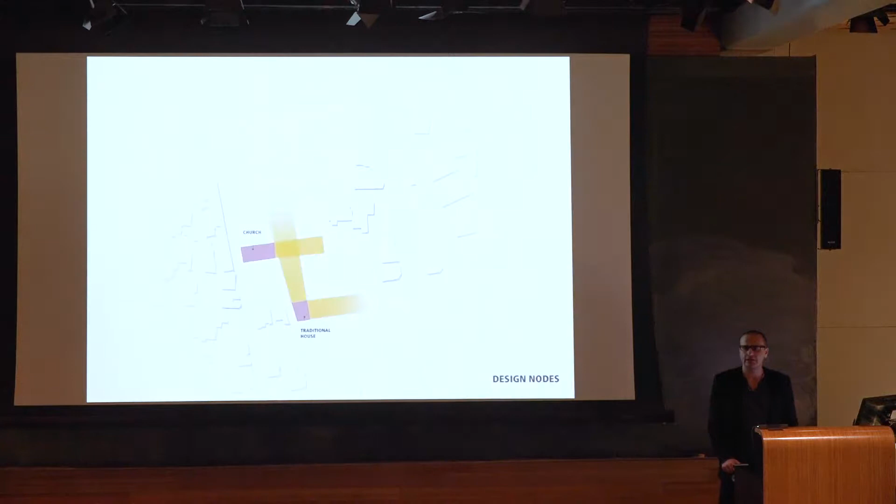So the BDD Master Plan is what we started with. When we met the client, we inherited a master plan that totally ignored a few old structures on the site - one is an old church from the 1800s, the other an old house, very traditional in terms of architectural language. So we thought to just add these to the plan, add value, and integrate these structures inside the project.

Just to relate a little bit to the map you've seen, this is the green line that we saw. This is the west, and this is the east side. We generated those masses based on zoning code and based on the grid line we identified.

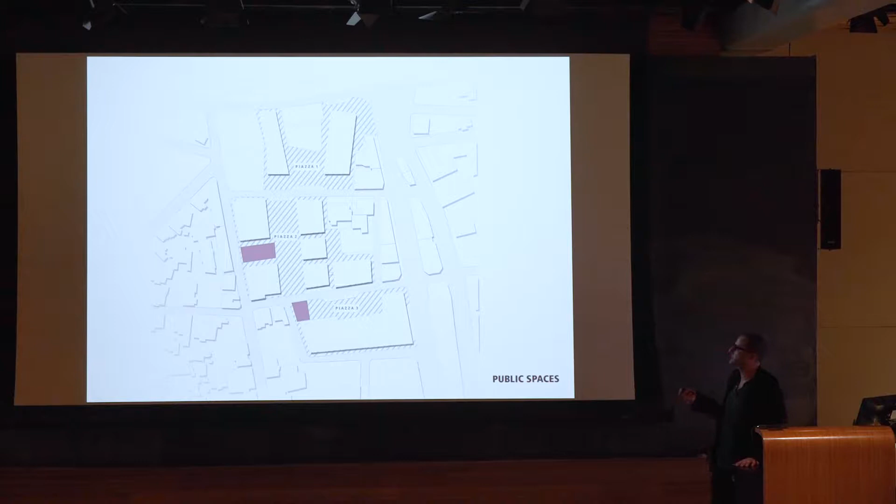One of the main things we're focusing on is the public space, those green areas we're calling piazzas. We didn't want the public space to be concentrated in one area, but rather flow on to the next block and further south. The idea is to create an openness that contradicts the division the war has had over the years, symbolizing a sense of convergence rather than division.

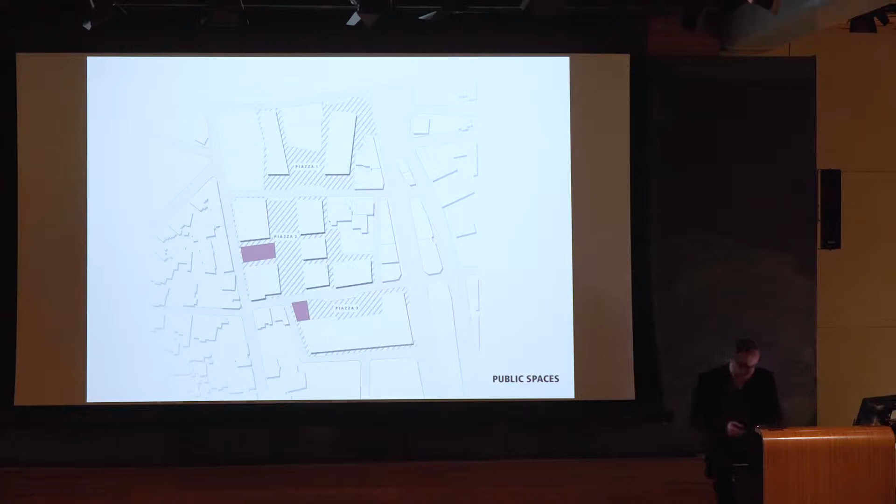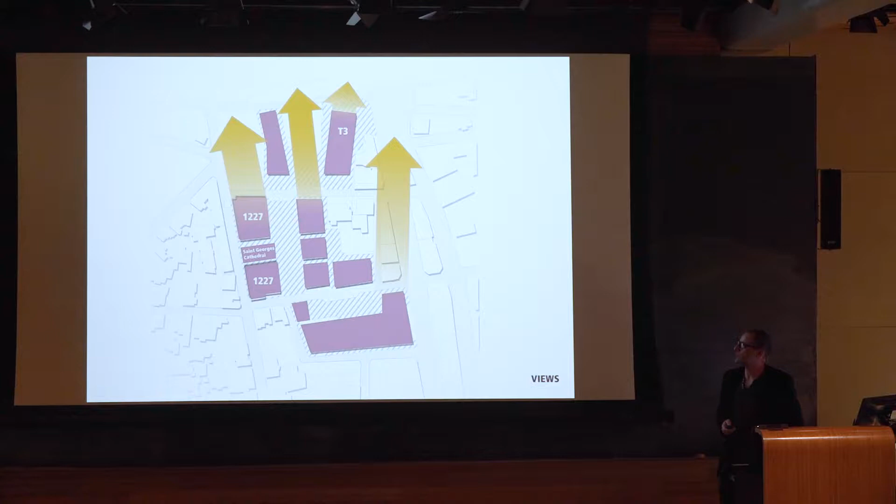This is a plan that was supposed to be built by 2022, but with all the actions happening around the area, it has now been pushed back to 2030. Once it's built, it will basically look like that.

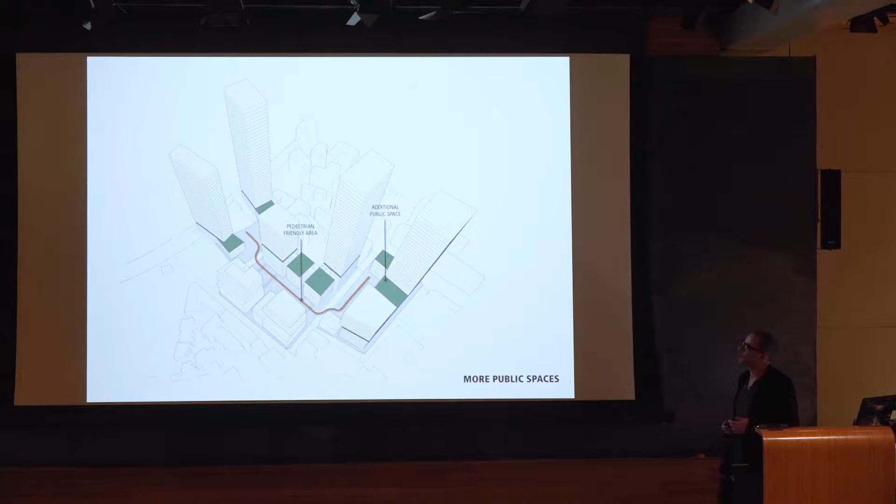We emphasize those open green areas by utilizing the layer on top of the roof, so we can multiply those areas and show how important they are for the neighborhood.

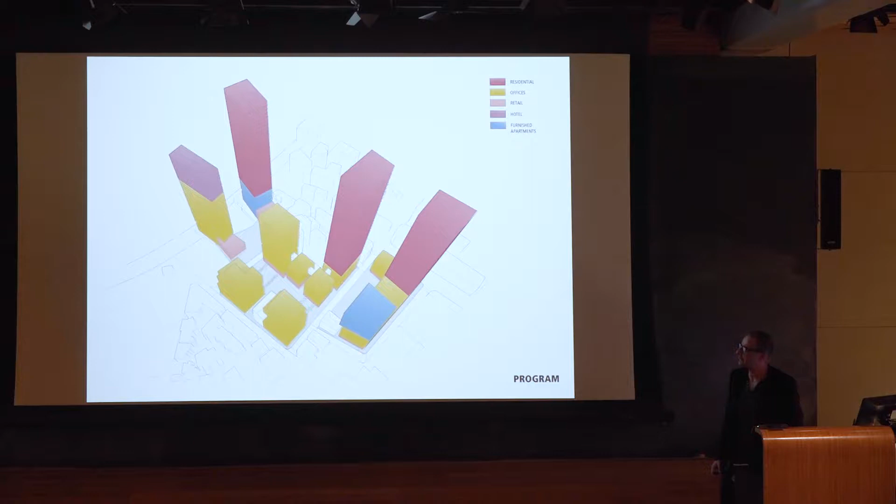Once built, it's quite a mix. Mainly it's going to be offices, but it will have a lot of residential that is mainly going to be the tenant of the BDD district, in addition to some hospitality project.

Up until this moment, the district was made out of renovated buildings retrofitted into office spaces, known as BDD 1227. This is the first ground-up project that we're working on.

When the first project started, it started with the north block as an invited competition. This lot is owned by an endowment of the Catholic Church, and the developer of BDD was worried that if these guys built later, they wouldn't have control over what would overlook the BDD Master Plan. So they went into a venture where the BDD guys would build these projects and operate them for some time, splitting the area in between.

By code you can't open to your neighbor. You have to step back, and there's a building envelope you have to follow. So by taking the building extrusion and the building envelope, we started carving into this block, creating this courtyard to legally get natural light for the offices and creating access from the side.

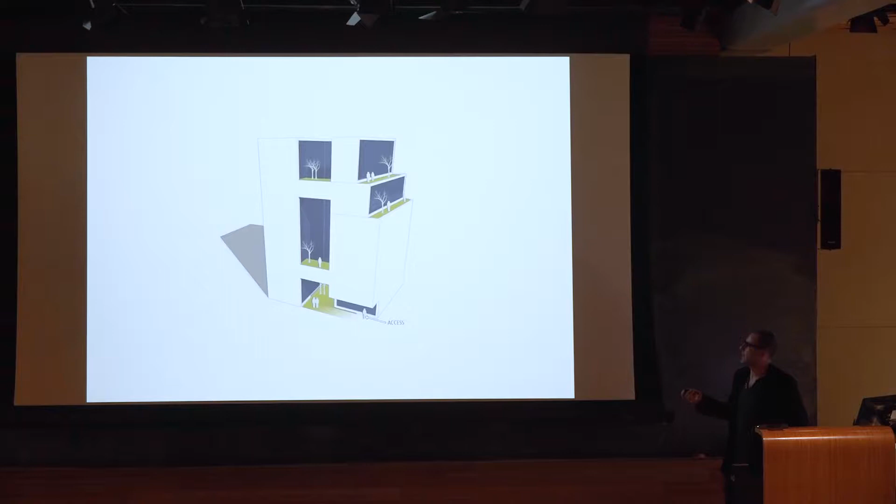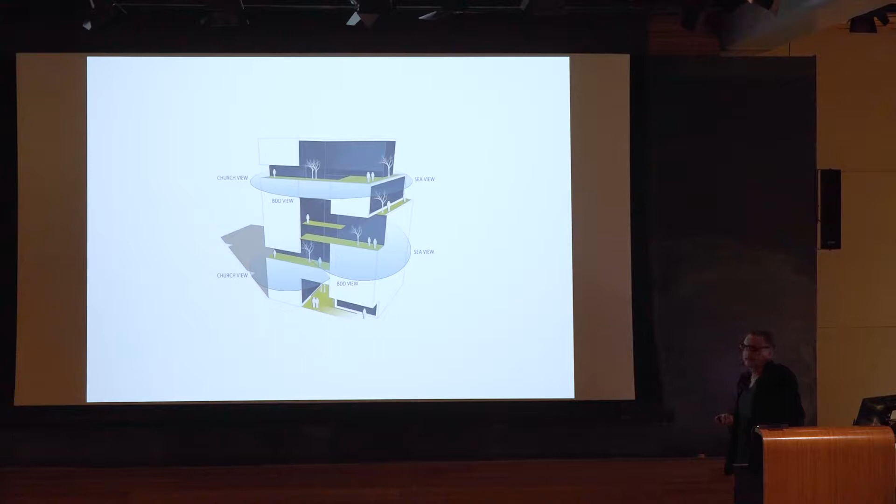This is basically where the master plan is, and this is the north side. With a series of cutting and carving, we introduced some outdoor areas. The weather is kind of pleasant over there - you have almost 300 sunny days per year, so the outdoor area is important.

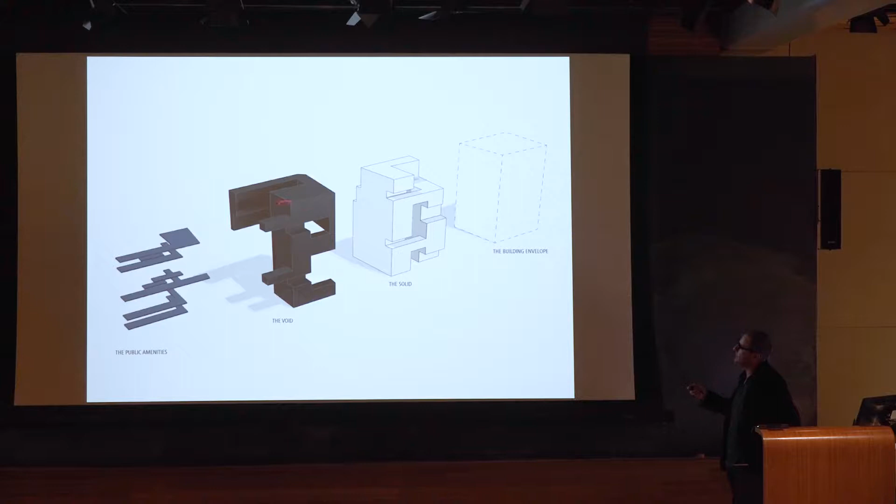This is how the components of the project are: the envelope, the solid, the void that was carved out, and the amenities or outdoor areas.

The other thing the client wanted was to create office spaces that really respond to what a digital district wants to be - this transparency, encouraging exchange between those startups. This was an important factor in their decision.

Once we got the competition and started developing the project, we were applying the French fire code as we applied for the permit, which requires 1.2 meters, about 4 feet, of solid area between the floors. So the whole transparency idea we had in the concept wasn't going to work.

So we looked at a system we employ on the facade where we can blur those horizontal boundaries between the floors, and since this is the first building, give it a look that implies technological advancement, which would go well with what BDD is about.

So we worked on these 3D kind of panels, perforated panels. They also act as sun breakers depending on their orientation and which facade they're applied on, and they help reduce heat gain.

As we were working on the North Tower, they thought, okay, we want to develop the lot to the south of the church, so we wanted both buildings to speak the same language. At the same time, there's this intention of having them less static, a little more moving, so they can communicate with each other, overlook the big piazza, and communicate with the church as well, being stuck in between.

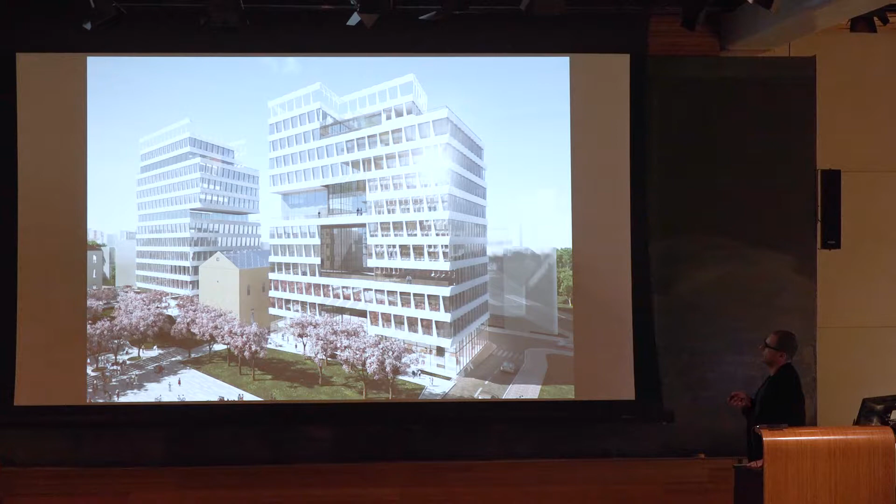So this is how these buildings will end up looking, with a series of stacking volumes.

Once we were in the middle of that project, the church came to us and said, since you're doing the whole project, why don't you renovate the church for us? I was like, all right.

That was interesting because this church had been there for a long time, and it had witnessed the war years, and it was pretty destroyed with no roof.

We took this idea and developed it in a way to create this spiritual space made out of this abundance of light.

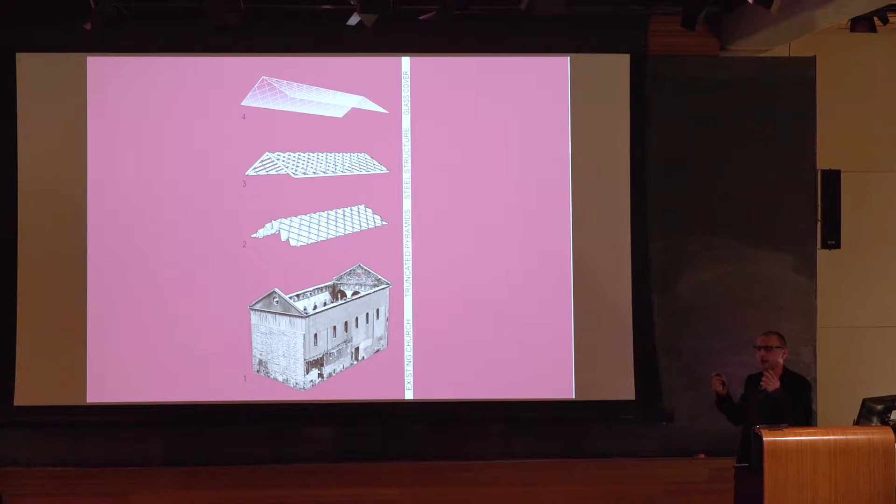Those truncated pyramids symbolize all the bombs that were exploding and throwing shrapnel, as if they were frozen in time, but instead showering the space with light rather than destruction.

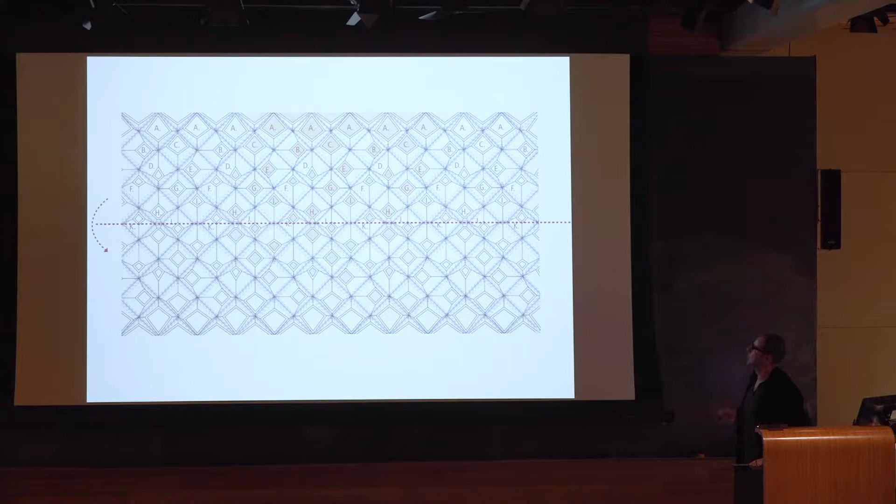That's a ceiling diagram showing the different components of the ceiling, and that's how the effect would look from the inside. One aspect of this project was that because the civil war was basically sectarian, the issue of religion is kind of a taboo.

In Lebanon, with the community of BDD almost 60% younger than 35 years old, most of those people were born after the war. So we are addressing the post-war generation when it comes to the design.

We wanted to create a space attractive for a younger generation, so they might be interested in at least visiting or looking at what a church or religion could do for them, rather than running away because of what they've heard from their parents or read in history books. That was one important aspect, making this church accessible to the younger post-war generation.

These elements look like the ornaments found in old Eastern churches in that region, but they're interpreted in a contemporary way. At the same time, they act as acoustical elements for the high ceiling space, about 15 meters.

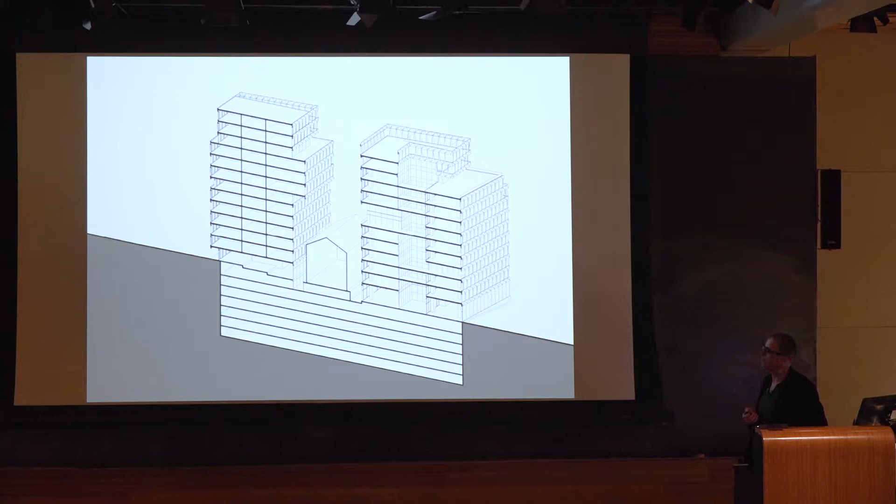So we had to come up with a system to hold the church in place. We used waler beams supporting the steel structure, holding the walls because they could collapse anytime, while doing the excavation of 6 basements underneath, holding everything in place.

So this is like as if we are inside the church looking down. This is the North Tower, or North building, essentially hanging the church up in the air and creating continuity in the basement for an efficient parking system for the project.

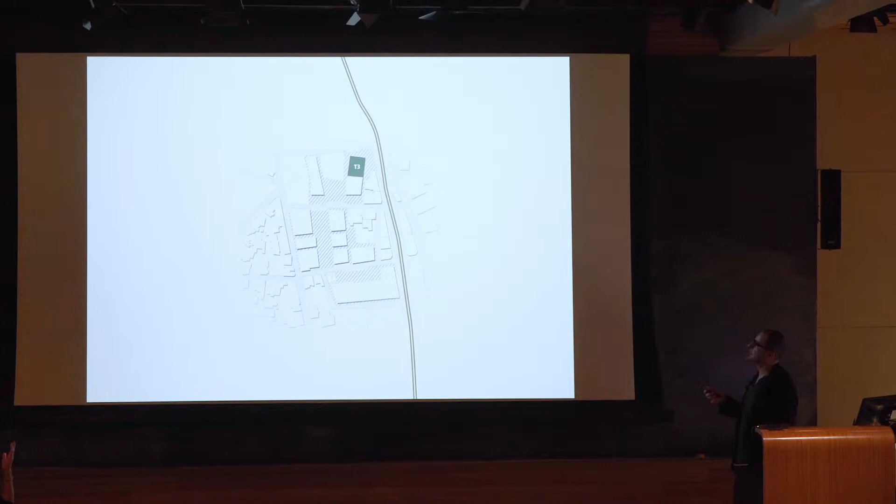The third project we're working on in BDD is called the T3 Tower. T3 Tower is located right at the edge, at the tip, overlooking downtown, and this is the most strategic location. So this is the signature building they wanted for the project.

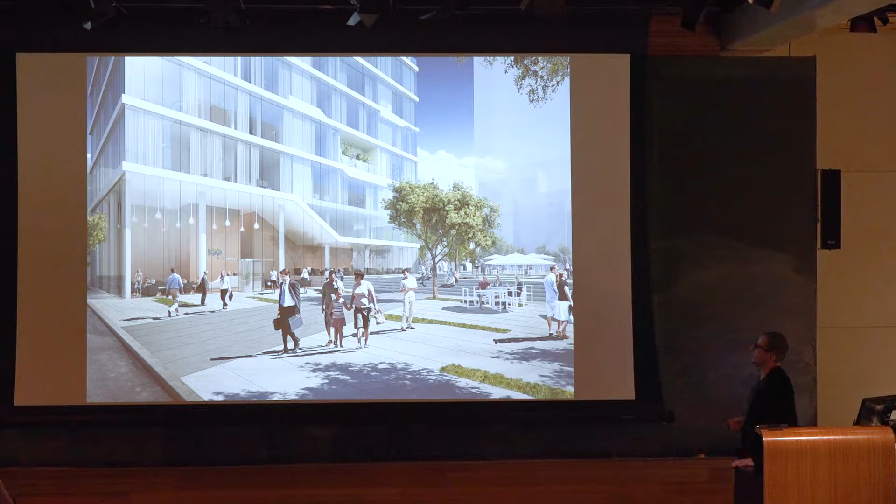It also takes the ideas behind the master plan, the openness, and deploys it in a vertical way on the building. So the building looks quite transparent, kind of blurring that division between east and west, because this is where it's located. One advantage of low-rise development is being close to common areas and having access to green spaces.

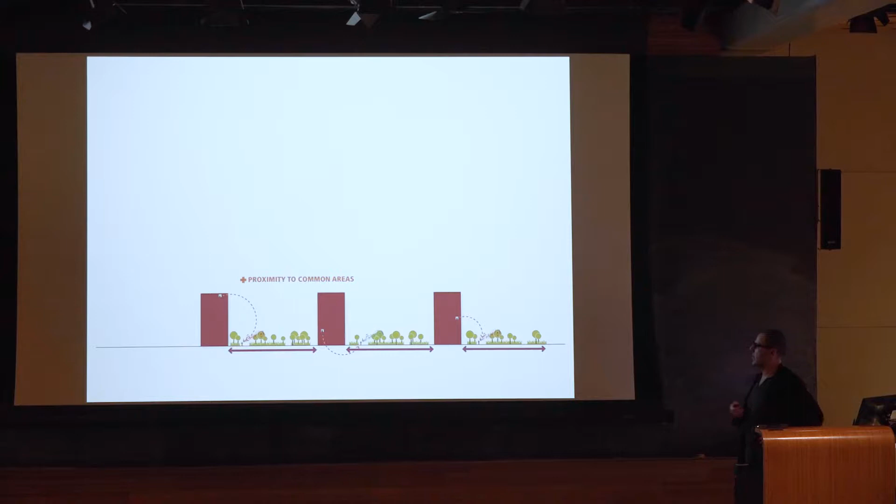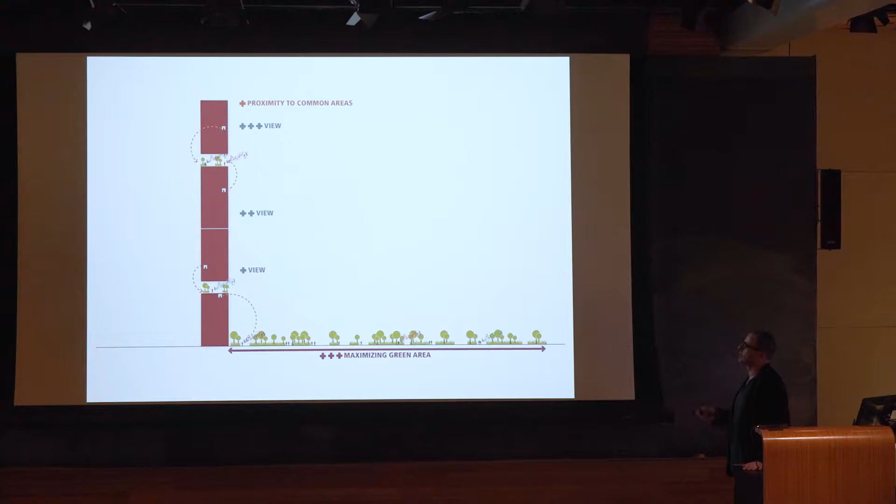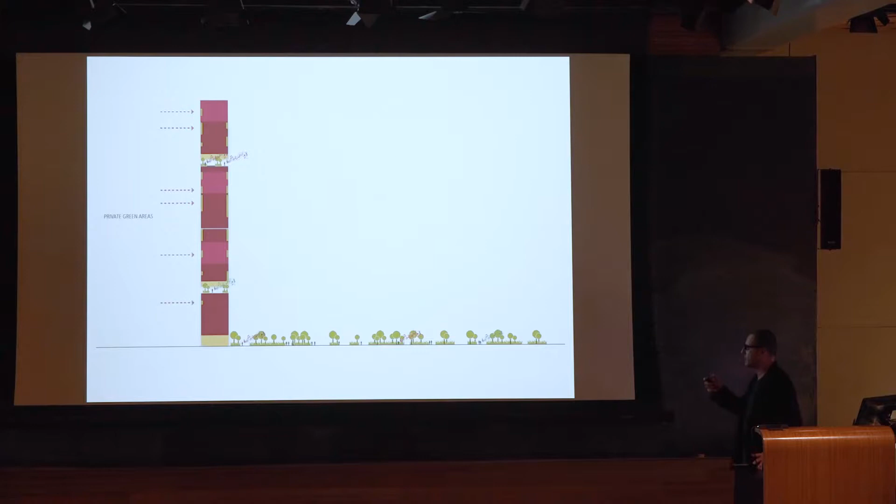With our case, we had no choice but to go with a high-rise. So we thought that by doing some stacking and inserting, we can get the same benefit of proximity to those common areas by inserting them vertically in the building, while also gaining views and creating different types of apartments, even bringing that green space all the way up and giving them not just as public, but also as private green spaces, becoming like a kit of parts. When you get your apartment, you have the option to choose if you want it green, a pool, or just a landscape area.

So that's a general section on the building, and that's how it is programmatically. It has a lot of variety of residential units, and they are all based on the community that will live in BDD.

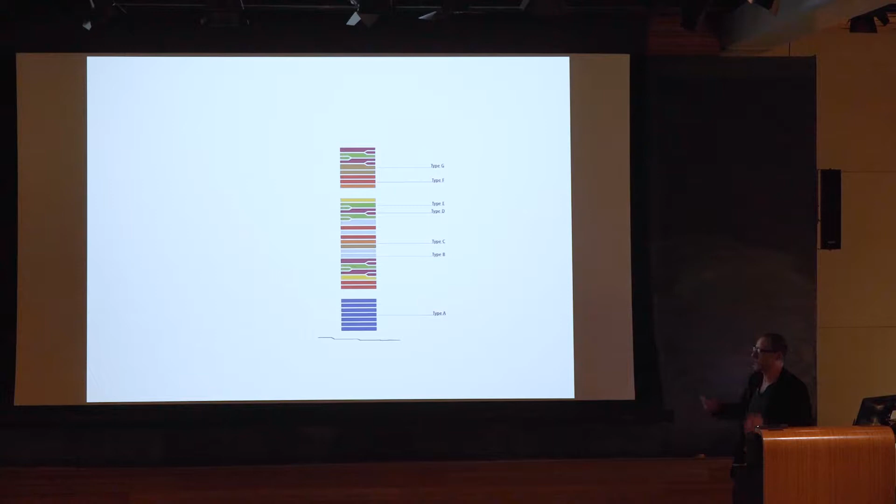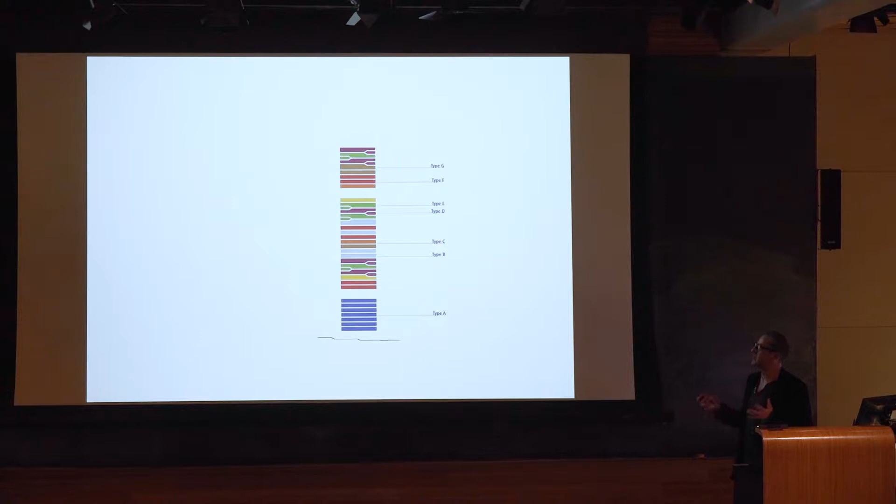We looked at Richard Florida and the theory of the creative class when we worked on this project, because this is really what this community is about. They have completely different needs than conventional or older families, like our parents. So open space is extremely important, the communication with the outside, and the size has dropped. Typically apartments in that region are really large, so it's no longer the case with these guys.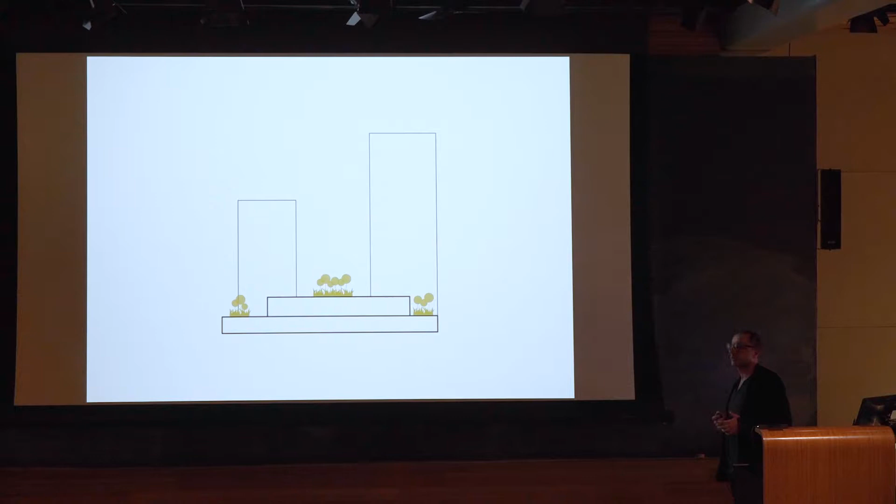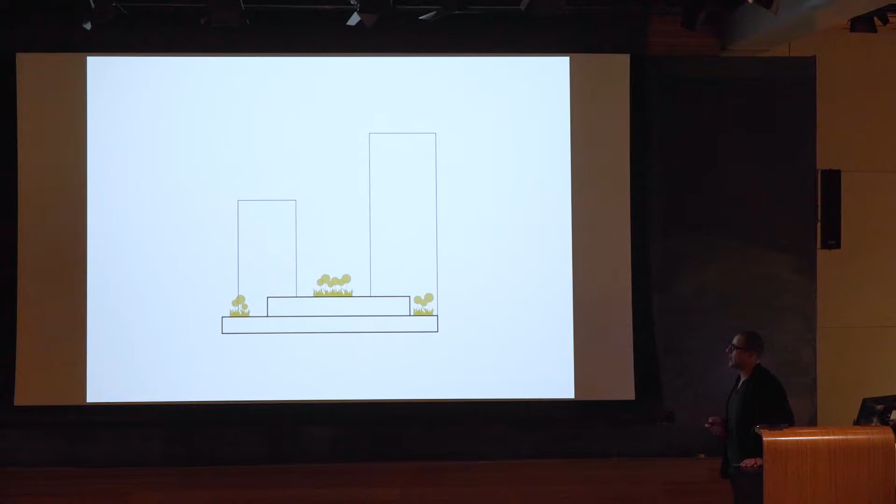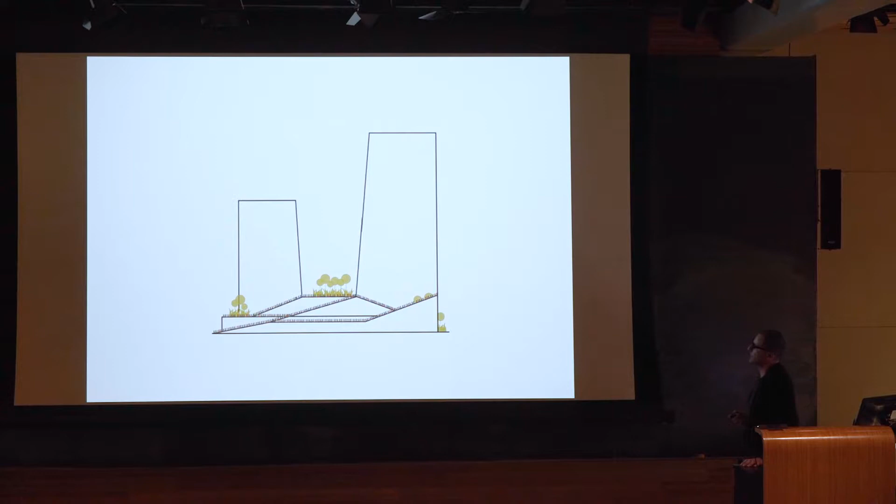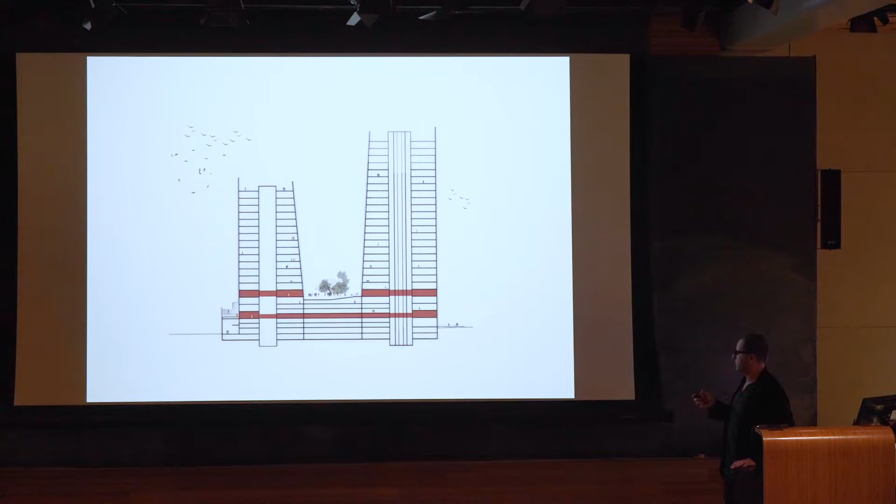At the same time, they are a city that is promoting itself to being pedestrian friendly, encouraging a lot of pedestrian walkways, wide sidewalks, despite the harsh weather they have over there. So we started connecting those different levels for pedestrians using some ramps, and we even shaped the tower, opening it up to emphasize the space there, showing where those public areas are in relation to that podium.

That's the massing study of the building, and the result is a podium that is sloping, taking people around, climbing up and down to reach that main public area. And this is the main corner overlooking the tower, so this is like the main entrance.

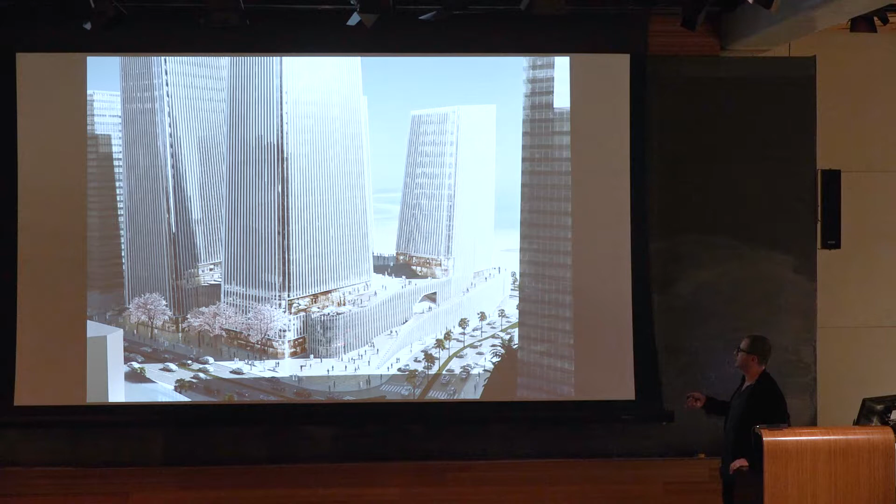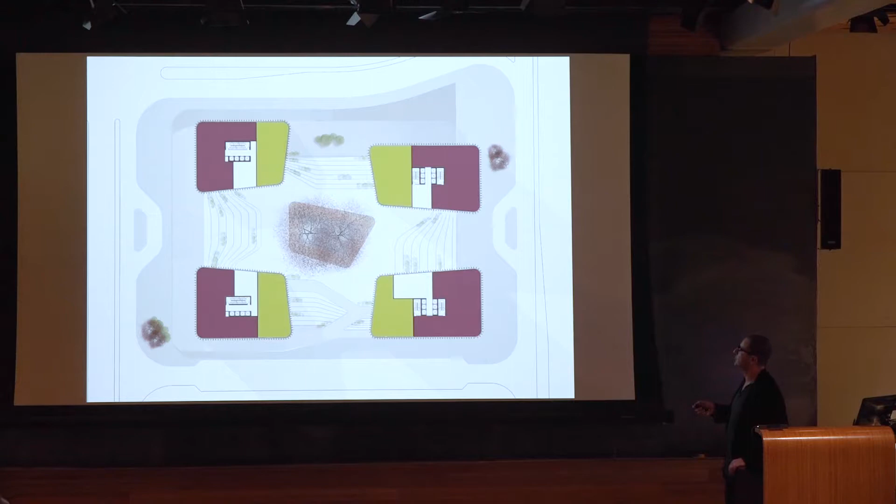So we used the podium to create this axis, and where it intersects with the horizontal floor, we have those cafes and public areas that enhance the project. That's the middle area with the topography of the podium climbing up to reach this central area.

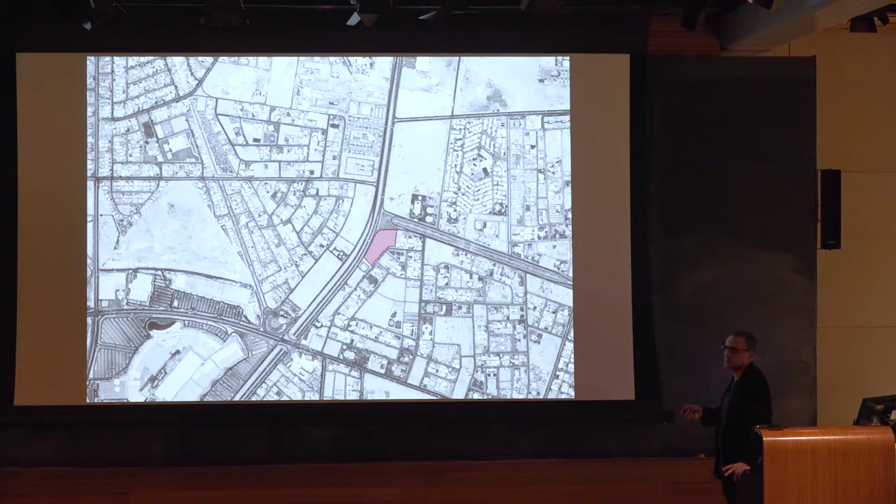Another approach on the public spaces in that country is a project we're doing in Dammam. Dammam is a city on the eastern side of the country towards the Gulf. Basically, the client wanted an office park, a series of office buildings with various floor plate sizes, on the ring road and a major highway, very close to one of the few malls they have. So this is where the site is.

We looked at different organization and plan, and we were inspired by the idea of the oasis, how we could create some porous organization with different and unique views for each building, creating access for vehicular drop-off or pedestrian access, and looking at how we could drop the public space a little bit to have this effect that you are contained in some kind of a valley, like the oasis.

And we worked on this because the program called for a ground floor of F&Bs, so to encourage the area to be more pedestrian friendly, we worked on the geometry of the building.

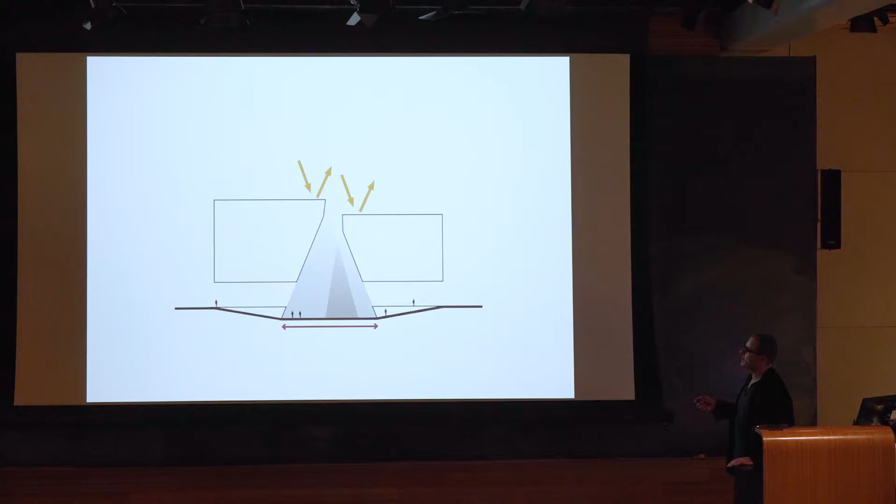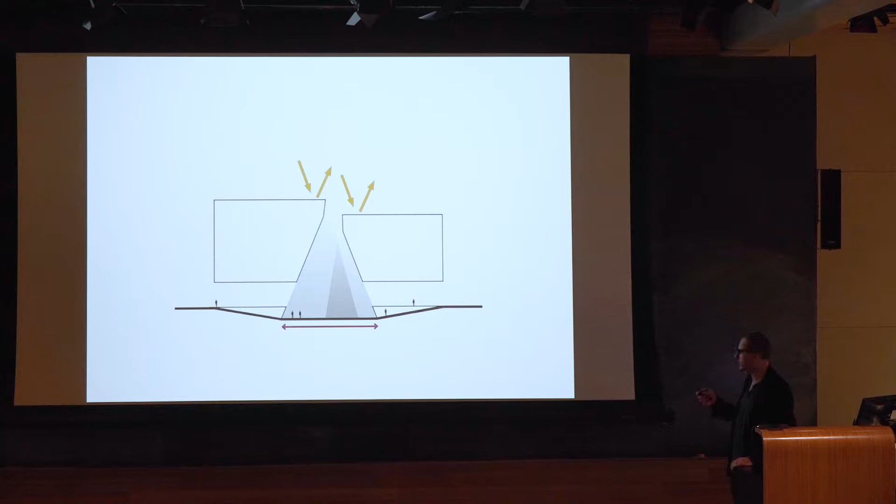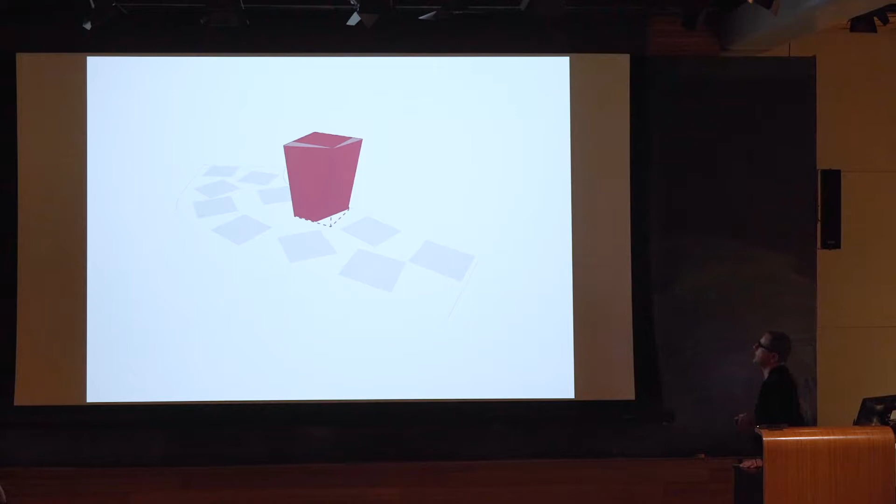So by making the roof floor plate bigger than the ground floor, we decrease the area where the sun rays can reach down, and the result is a more shaded area in the middle. Adding to that, some water features at the entrances cool the air as they go down. So this is like the steps of how you could shape those buildings and create those completely shaded spaces.

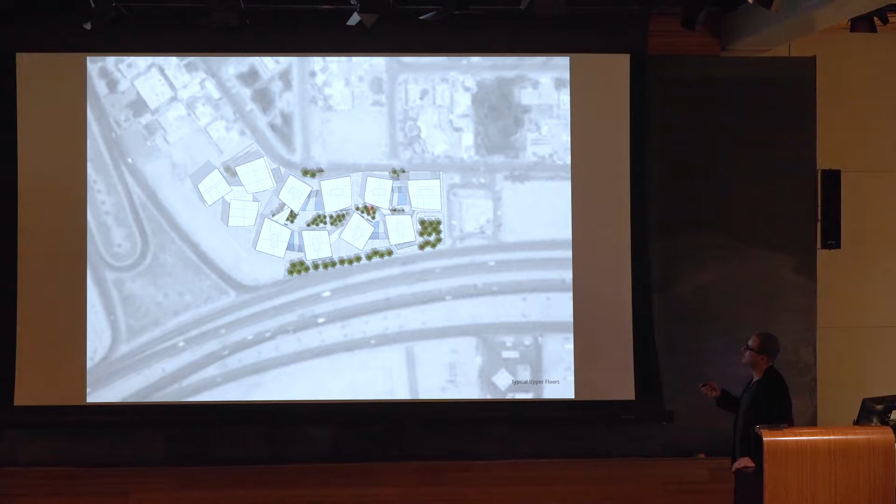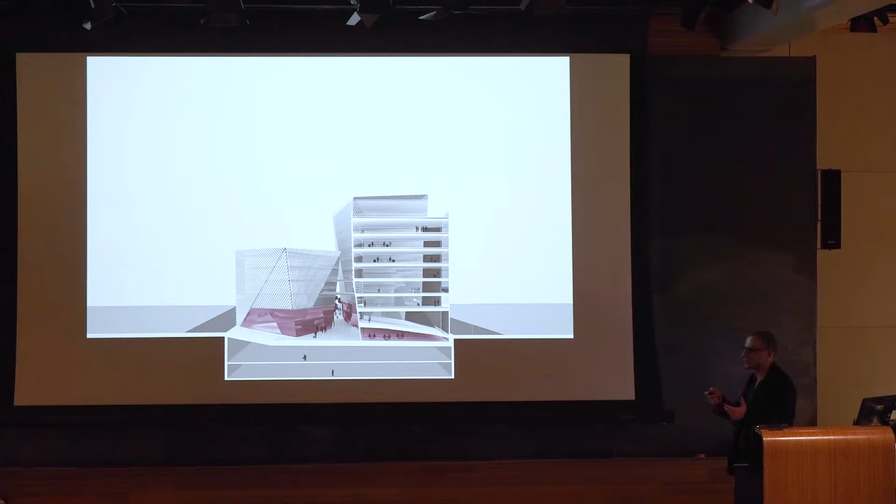That's how it looks in plans, with a lot of green spaces and alleys for pedestrians, with all these water features. And with this section, this is kind of what we were looking to have - the oasis, the old traditional way of how they used to do their markets and souks from the highway. So it's a series of pyramid-like facade buildings that align on the street.

This is another theme that we've been working on, again this obsession with privacy slash luxury, and when you combine both, you can have something extremely exotic.

This is a project for one of the king's sons. Basically during the summer, the king leaves the capital Riyadh and they go to stay in Jeddah, which is kind of the beach city. Not that they go to the beach, but a lot of people travel with the king - assistants, ministers, princes. So all these guys, there's a lot of people.

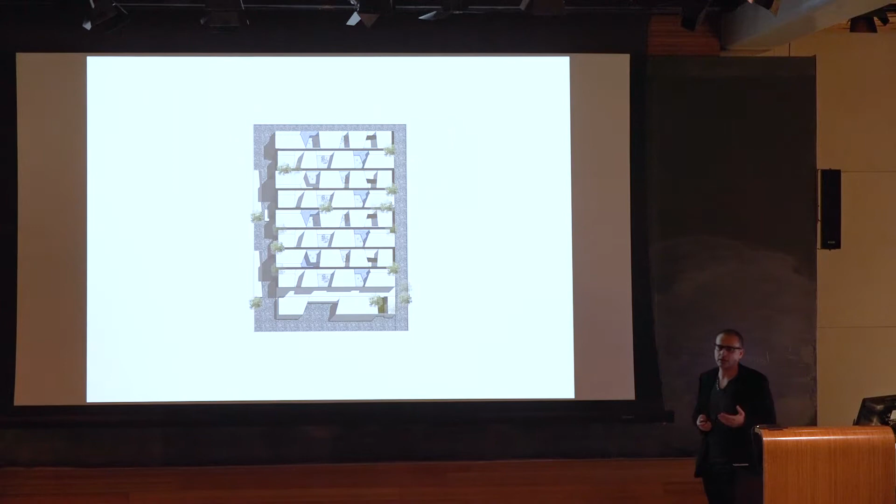So they needed a place to stay during their travel that is completely private, completely secluded, where they can see no one and no one can see them. This is really an obsession.

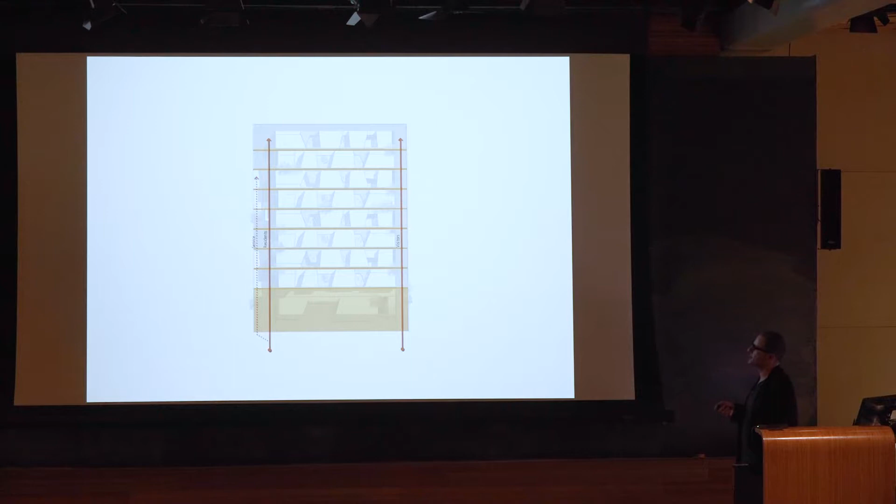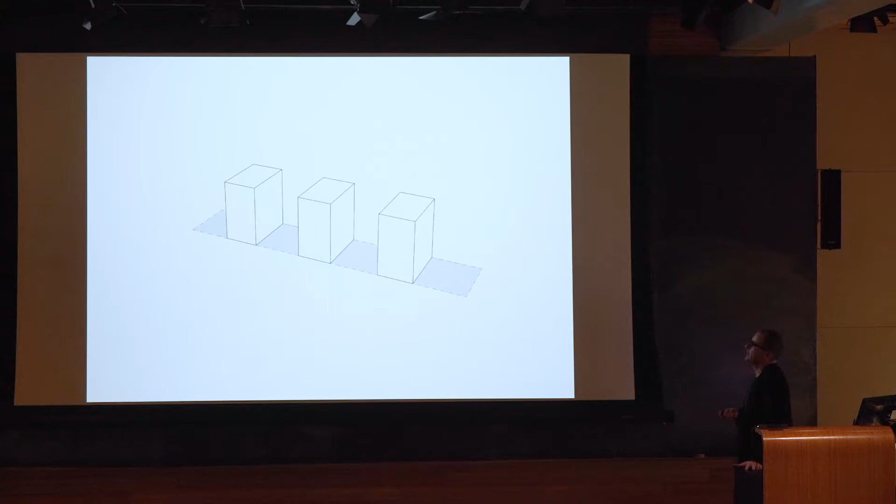So we looked at the lot and how we could create those villas with maximum privacy and maximum open spaces. So the circulation is limited to the ends, where we could maximize the space in between. Taking just a typical box of what a villa or house could be, it was split into pieces and then connected, creating the spaces in between.

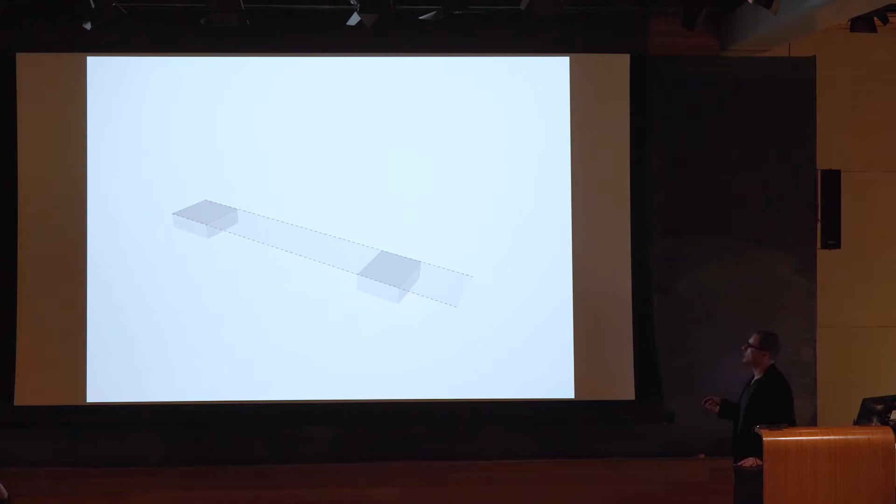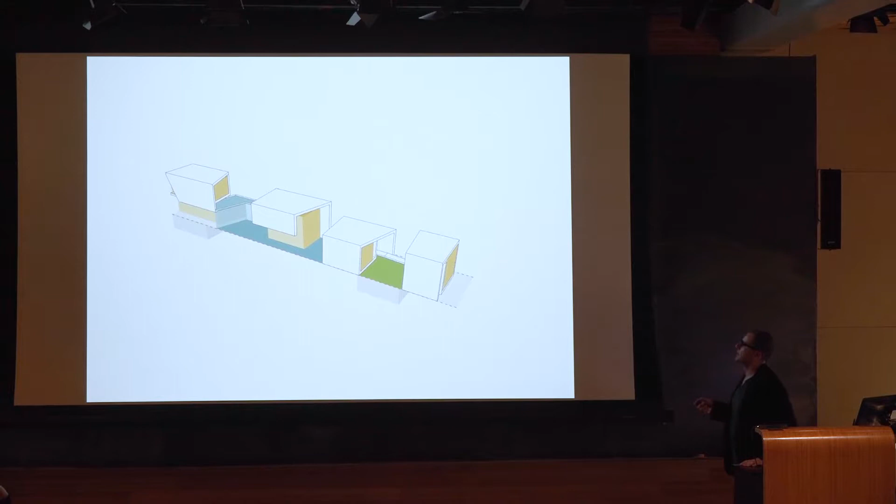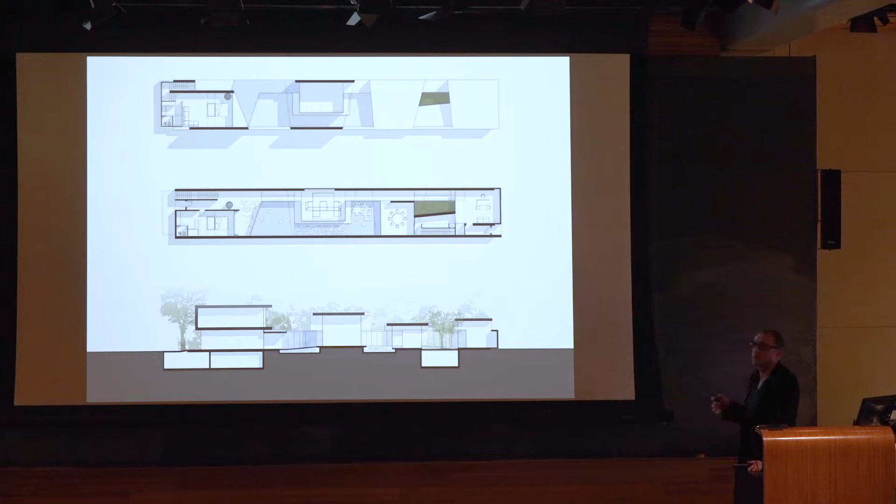So as a diagram, this is like the private garage with the service access point, the building blocks above, wrapped around with some kind of surface, and introducing landscape with water features, like waterfalls. In plan, it looks very fragmented, like pavilions with the bedrooms, an office space. So when the assistant of that VIP person comes in to sign some document, they are only limited to a very small access. The service comes from downstairs, serves the dining and the space, and then they can just leave. So it's all about not being seen, or them being felt that they are around. And this is like a view through those blocks.

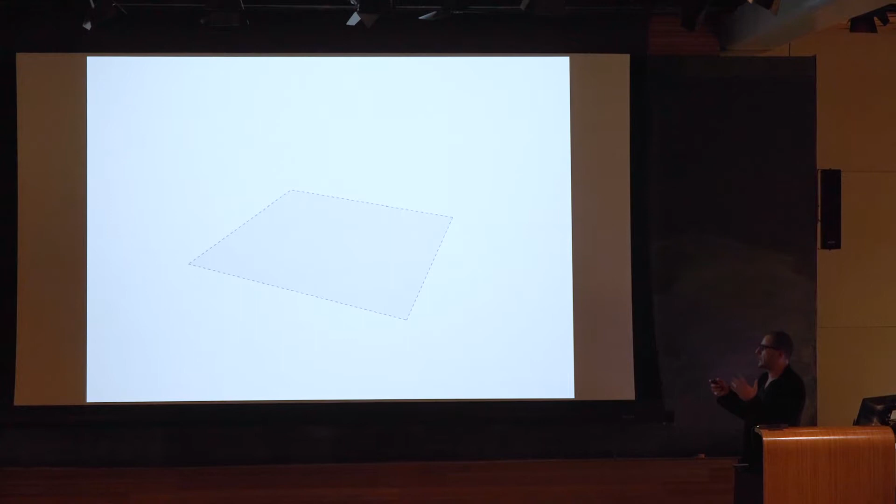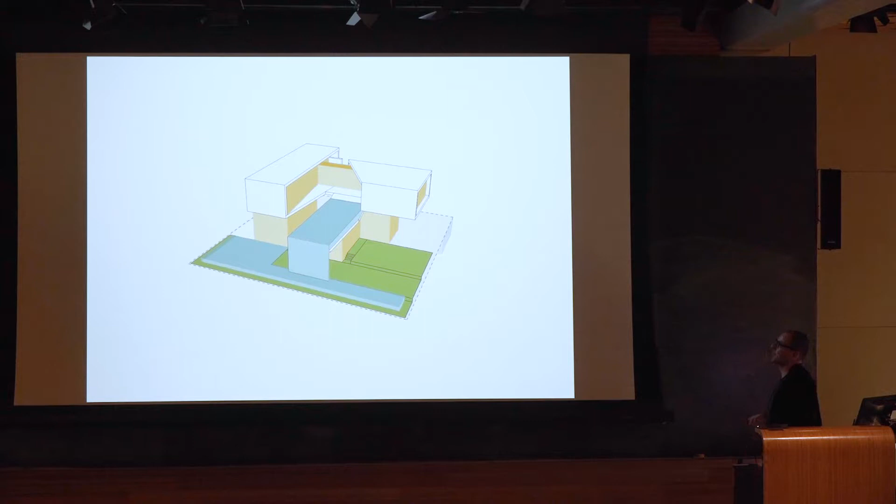They had two sites and two different typologies. The first one we saw is for a VIP. This one is for the royal family, so a prince or something like that would come and stay in this one. It's the same thing. I remember when we were given the brief, they said they want the most luxurious place to stay, and they want to pay, I don't know how much per square meter to build that project, but they want something completely different. Then you start putting effort on things that may seem superficial, but they respond to a certain culture.

Basically, this is the same story with a different arrangement. They have two master bedrooms, one here, connected with a bridge. The pool is elevated with a glass railing that creates a waterfall going down, and the living room down there has glass blocks so you can see the pool from below. Things like that just translate what the culture needs or what the culture is looking for.

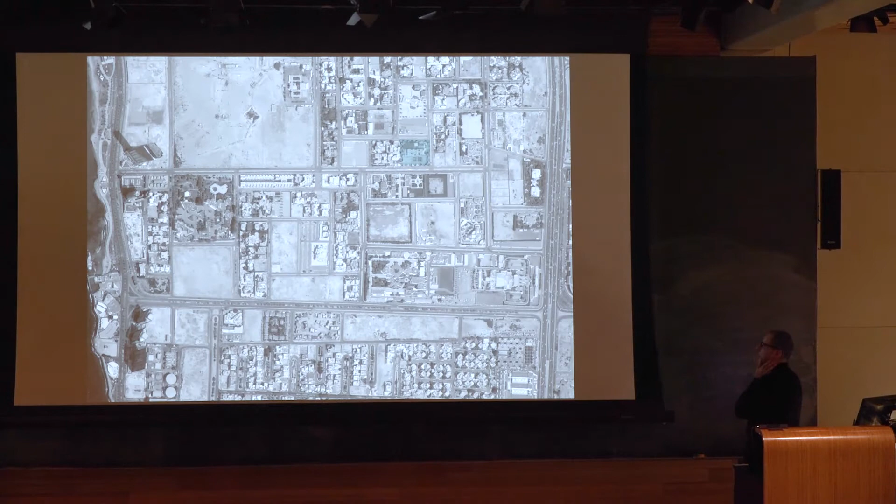Another similar project in terms of theme is the Blue House, but this one is privately owned, for a family of a prominent businessman in the city of Jeddah. This is also about extreme privacy. This guy has 5 daughters, so there's an even bigger layer of privacy, because in Saudi culture, until very recently, they separate women from men, and having 5 daughters is a big challenge.

So basically, this is a lot that is in the city. It's almost 11,000 square meters, so that's like 110,000 square feet, and it's just for one family. The built-up area is about 40,000 square feet. The way the house is split, it has many entrances - service, secondary entrance, the main entrance this way, and a series of courtyards.

These courtyards are service courtyards. The client wanted to hide anything that is service, so they have 8 bedrooms for drivers underneath here, with the main kitchen, the cooks, the security and the guard. They all share this courtyard. So as you enter, all you see is greenery, and these spaces take natural light from the side. This is the service courtyard overlooking down to the domestic helpers' bedrooms - I think there were 4 or 6 right there.

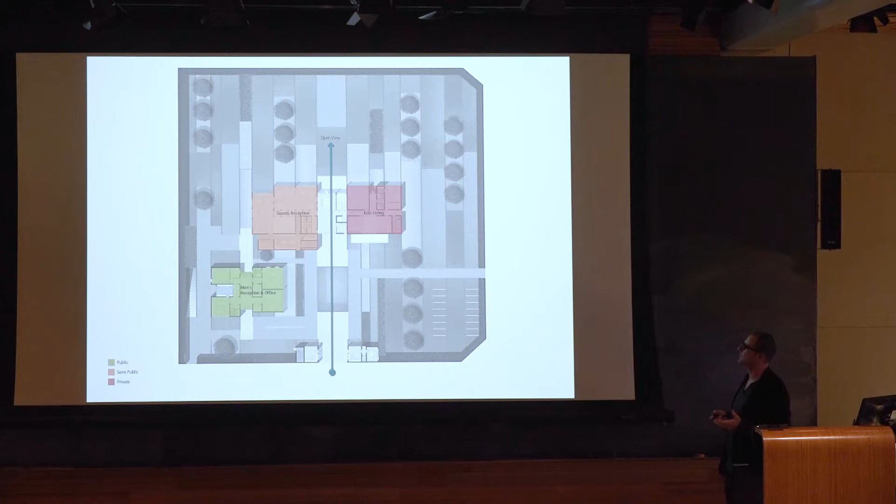And so when you enter, this is how they are hidden underneath - that's the second one over here. And so there is this obsession again of being above and hiding the service.

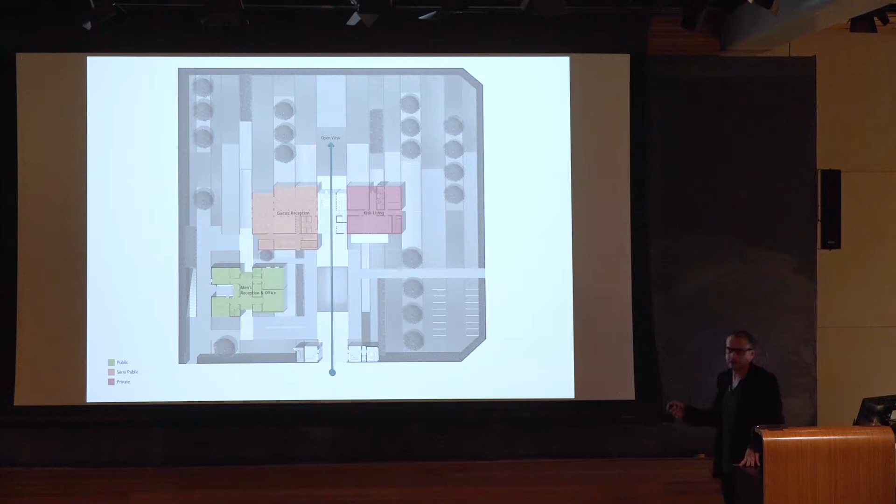When it comes to the main component of the house, there is the men's villa, or diwania in Arabic, which is basically the men's salon or reception area. Then there's the reception for guests, and then there's the kids' wing, which has a library, gym, a guest bedroom, and their own living room. And it's fine if you see through here, because you're not going to see anything - all you see is some green, so they're not worried about that transparency.

Upstairs is basically for the kids, so 4 daughters. Actually the 5th one is married, and that's why there's a guest room - she comes with her family and stays downstairs. That's the family living area, and that's the master bedroom, which is 180 square meters.

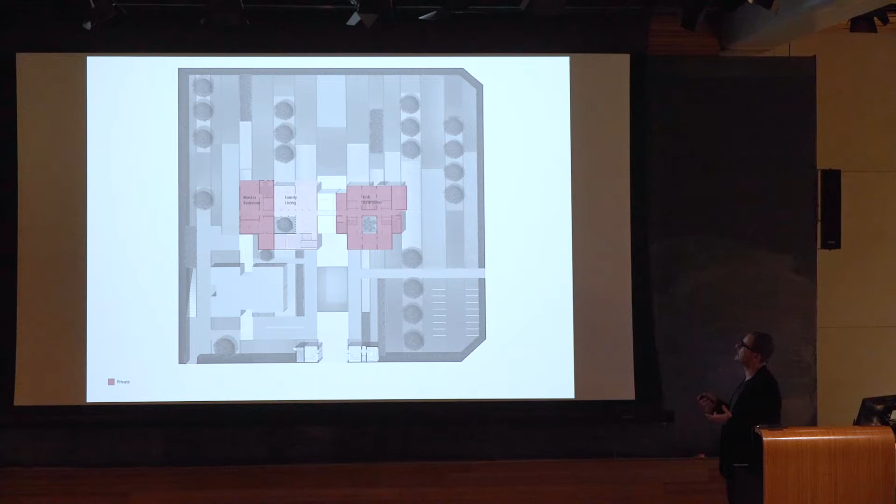Basically, the importance of privacy has led to a series of courtyards around which the house was developed, and it's amazing how much you could do to secure this privacy. All the building facades were related to the issue of privacy. So we developed a contemporary screen that echoed the old screens we'd seen in a previous picture of the city - they're called Musharabia, made out of stainless steel tubes attached to sandstone imported from Spain. Jeddah is very humid, so sandstone is really good for the humidity. And this is one of the courtyards with small openings that give onto the main plaza outside.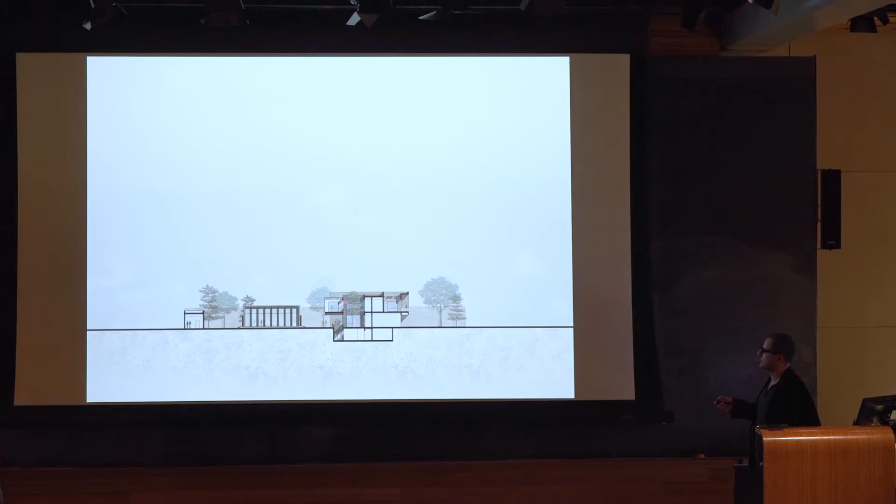That's another courtyard they give to the living room, and that's for the family living. So all these series of courtyards lighten up the space and make sure they are not seen from the outside. And this is how the section is developed. So this is a service courtyard, this is the family courtyard, and the office sits right there. That's how the building looks like.

You're working with a mass and you're trying to just punch it where you really need to. And that's the office overlooking the house. For me, this picture is interesting because this office looks like it's even protecting that house or those daughters that they have.

And the pictures are taken using my phone because we were not allowed in the house once it was completed. So it's like, you can't go in, we live there, you have to respect our privacy. And plus, we don't want you to copy the design. I think they don't know we have the drawings.

Going back to the village of Faraya, we saw in the map of Lebanon, it is the winter sport village, like an hour and a half drive away from the capital. This is like a weekend house for a family of 4 that don't even live in Lebanon. They live in Dubai and they go to spend the summer and the winter, the Christmas vacation, and the mid-year break to go skiing. The site is right behind those trees right there.

So the area is famous for all these rocky formations you see even further away and even here. This monolithic natural bridge is actually something interesting to see. And this is something we were inspired by when we took over this house.

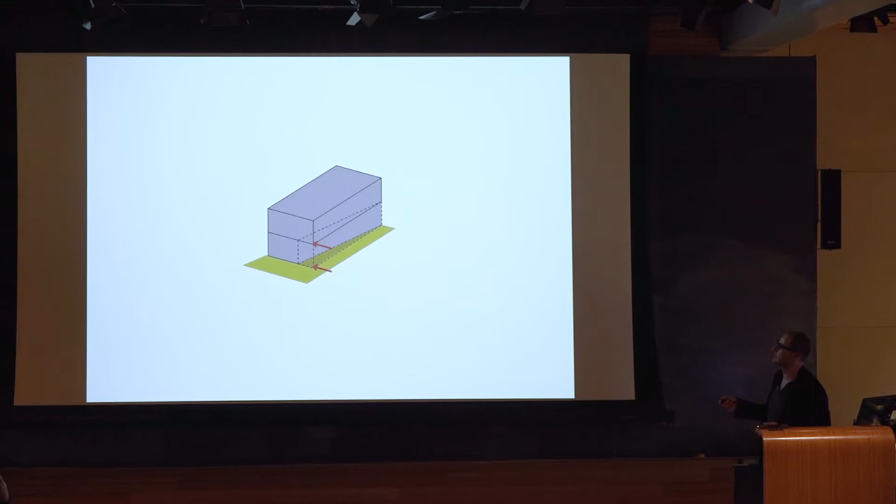It's a 600 square meter lot with a 250 built up area. So we took the building envelope and we started slicing it. I call it shaped by the views. There's a public garden that's going to be developed right next door, and we have open views this way, open views towards the mountain right there, and we'll put a skylight. So it's as if those side angles came and sliced the building.

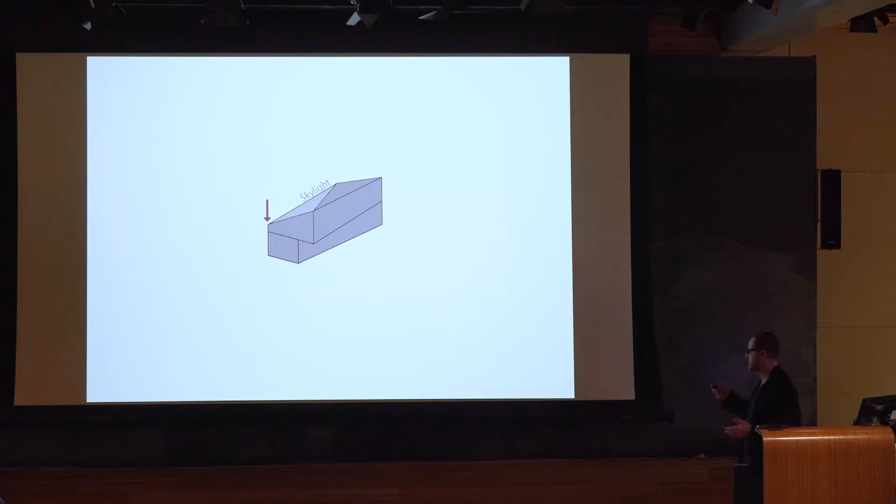Basically in terms of program, there's just a couple of bedrooms for the kids, a bridge that acts like a kind of sitting area, reading area, the main bedroom, and the living space that is open on both sides. So during the summer this is being oriented north. When you open this side and the other, you have a really naturally ventilated or cooled area. That's this section over the deck and the main space.

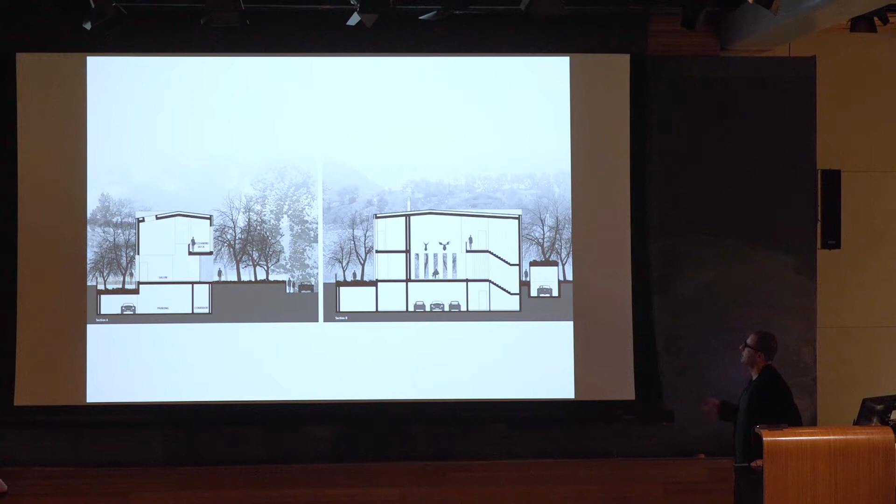Going back to Jeddah, this is a project we're currently working on, but I thought it's interesting because it also relates to the public space, and I thought to share it with you guys.

There's a lack of public space in Saudi Arabia, and right now they just developed the waterfront into a park, and this is like a big thing for the city and a big thing for the citizens. It's like the only way out, as a breather.

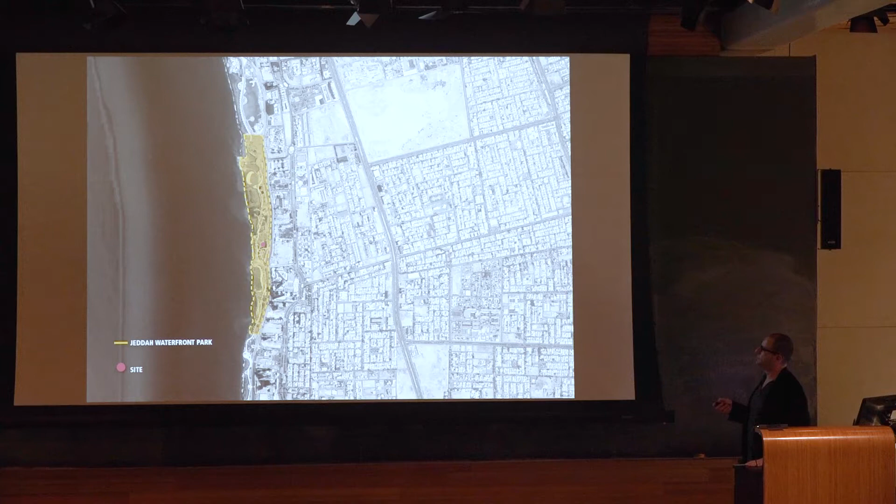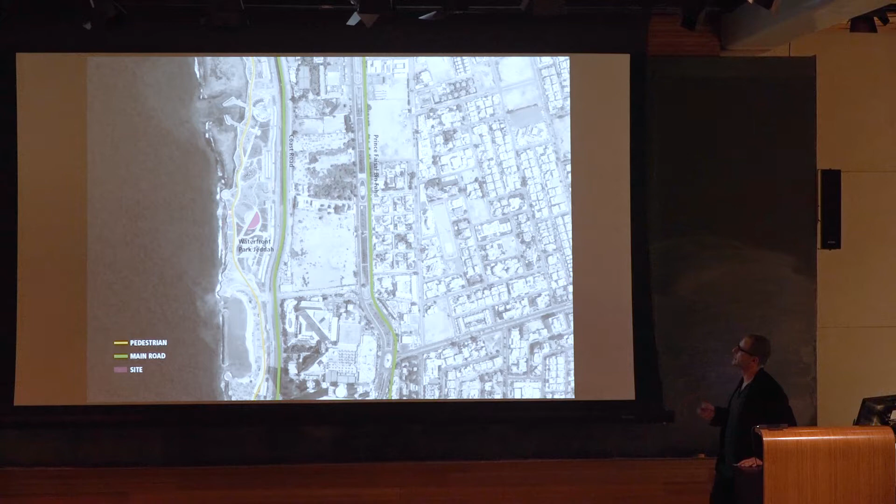Our client, basically through the renovation of the waterfront, the city has identified spots for small little structures that will have F&Bs or some shops. This is the site that we were given. It's called C9, and it's dedicated for commercial use. It's like 1,000 square meters. It's probably the biggest among the whole series of sites, and it's opening this way to the sea and this way to the coastal road.

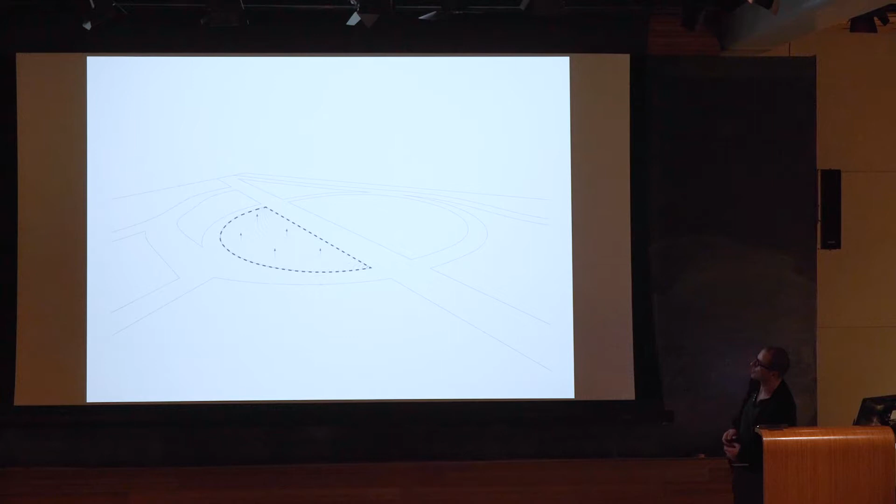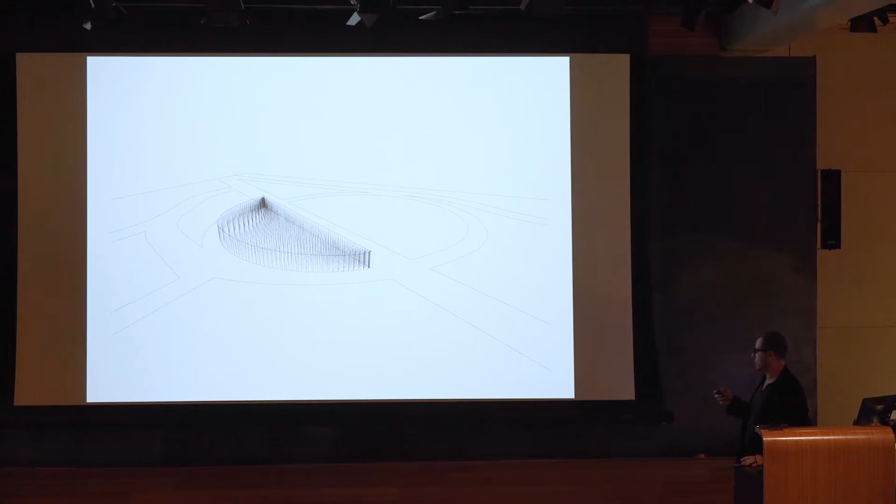One thing we wanted to make sure is that we didn't want the building to interrupt the park. We wanted to try as much as possible to have it integrated with the park, with a 5 meter maximum height allowed right there. What we try to do is push the side to the sea by creating some kind of a low point here and pull the point on this side up, where we could get the maximum exposure for the shops, for the high traffic road on the coast, and where we could engage the public. So the public is very important because they are not used to public spaces.

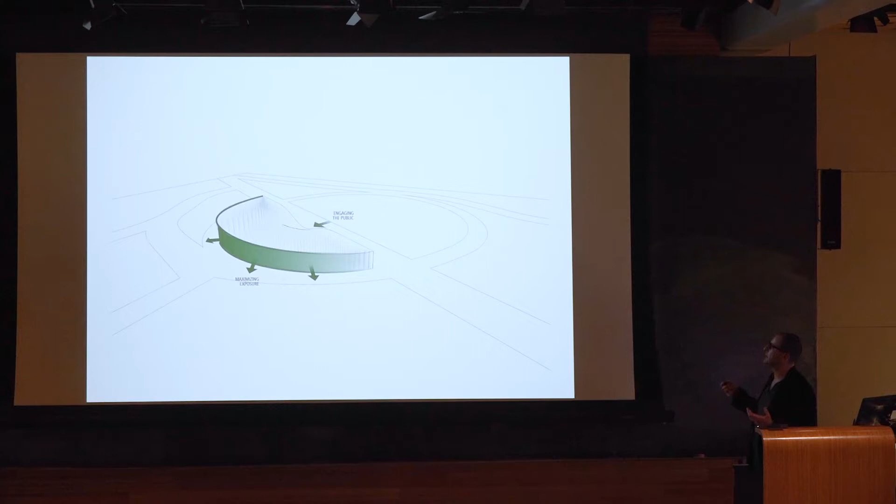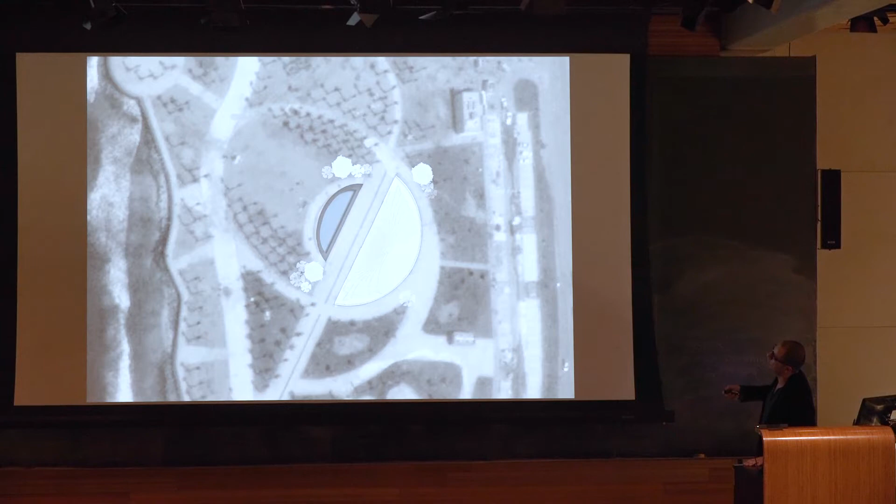So this is the first park, and it's extremely important for us to take this into consideration as we design. The building looks like it completes whatever landscape design they had there. In section, it has an access point with the shops oriented toward the road, and it starts to act as an amphitheater where people can climb up, wander around, and enjoy the sunset view. This is the plus 5 meter point, the highest point in the park. It could be pleasant just to sit there and hang out.

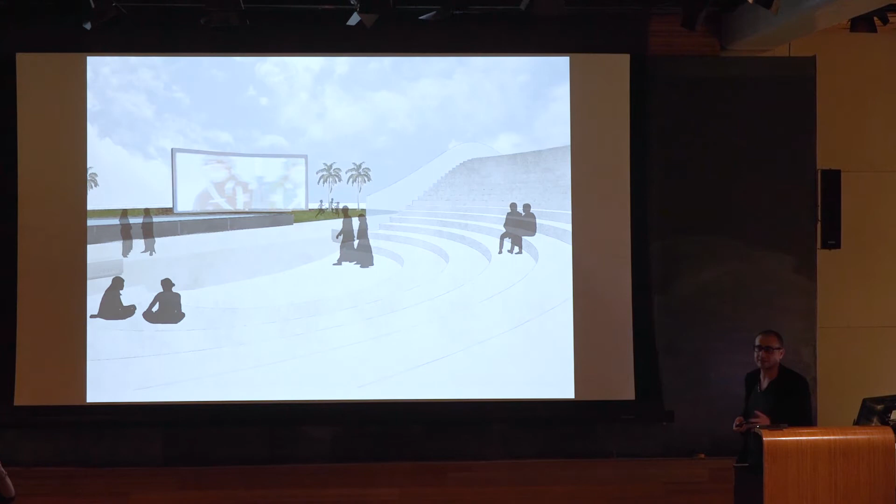With the new law allowing for movie theaters, we thought, why don't we just put an outdoor movie theater? We presented this to the city and were surprised they liked the idea. Since this is outside of the property, they're going to provide what we need in terms of poles, stretch fabric, and things you can dismantle when not in use, for an outdoor screening, as long as the client doesn't charge for it. That was the requirement. So this is ongoing.

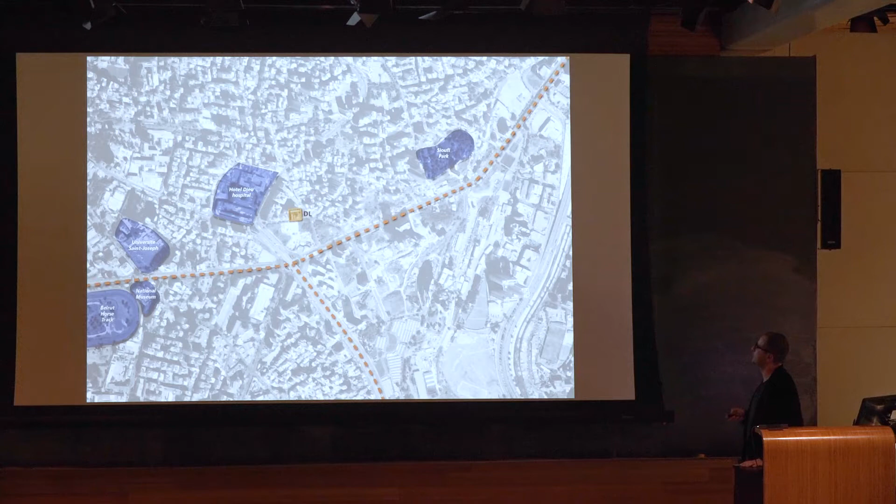Going back to Beirut, the DL project is the first project for us in Beirut as a practice, as PARALX. It's located on the southeastern side of the city on a hill, overlooking the mountains on that side. It's also close to important infrastructural elements like a big hospital, a national museum, and a university. This is basically what you see from Beirut — mountains that go down and touch the sea. So we wanted to celebrate this uniqueness of the site.

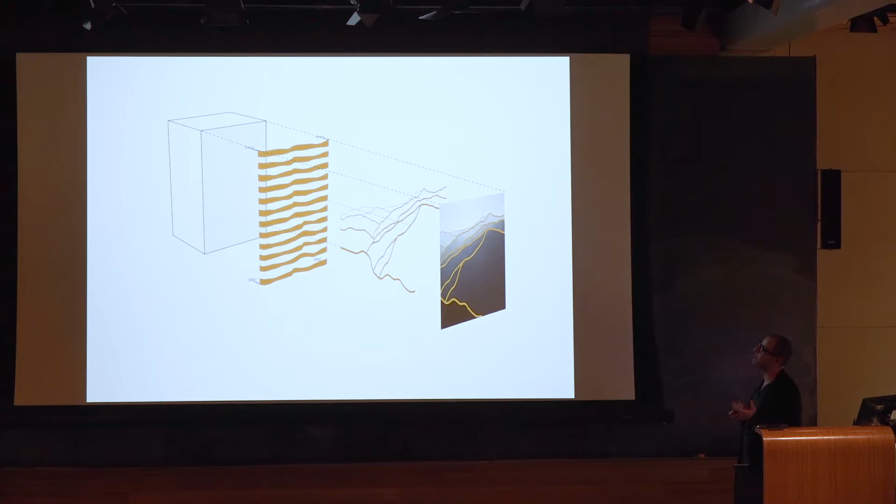We took the silhouette of those mountains and projected them onto the building, trying to create or animate the facade by linking it in an emotional way. We started framing those views, but the frame isn't really orthogonal — it's curvy, just like the mountains. This shows all the surrounding mountains, and the city limit is right there where the hills start and build up into mountains.

These act at the same time as an extension to the living space. Balconies and terraces are very appreciated in Lebanon because of the nice weather, as I mentioned earlier, and at the same time they act as sun breakers, providing protection from the sun on these balconies.

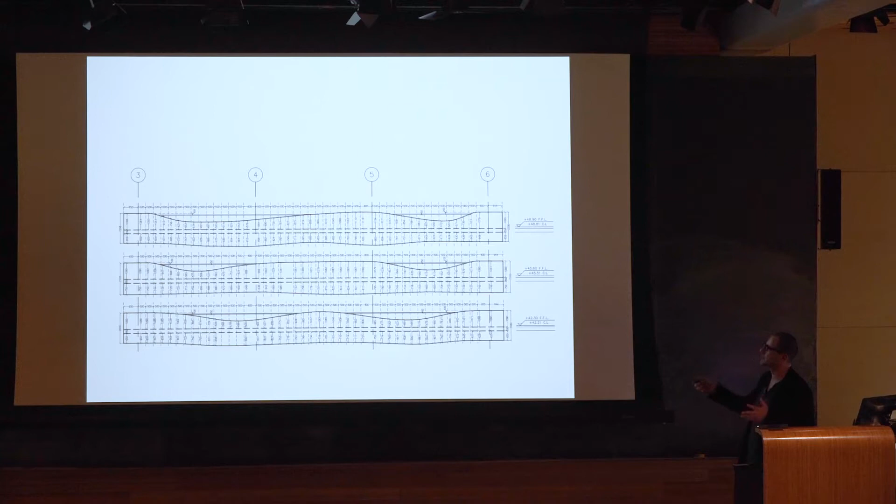It was a very interesting process how to build this. We had a series of 3D models going to 2D. I think they used the manufacturer's Fusion, Autodesk Fusion, laser cutting over steel to create the formwork. So it was an interesting process to go through.

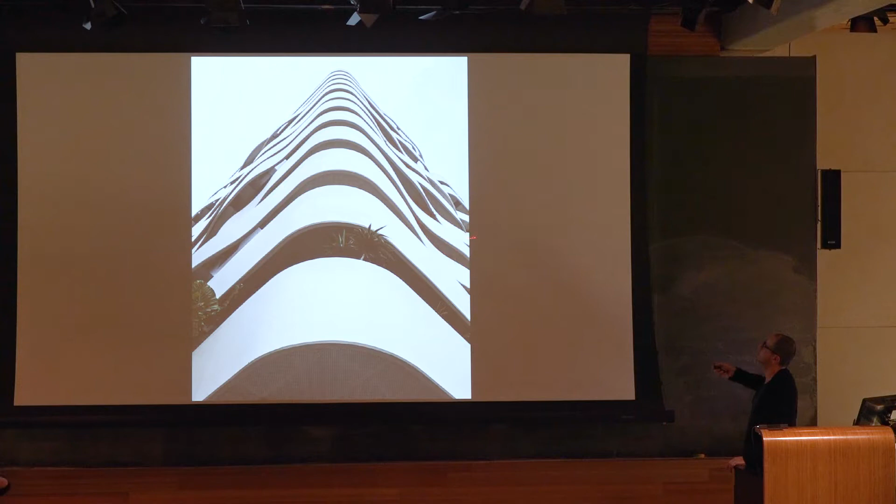That's another view looking south. Some detail of the tension point is also interesting — how the topography starts moving a lot, and then when it reaches the corner, the movements are more subtle. This is the lobby entrance.